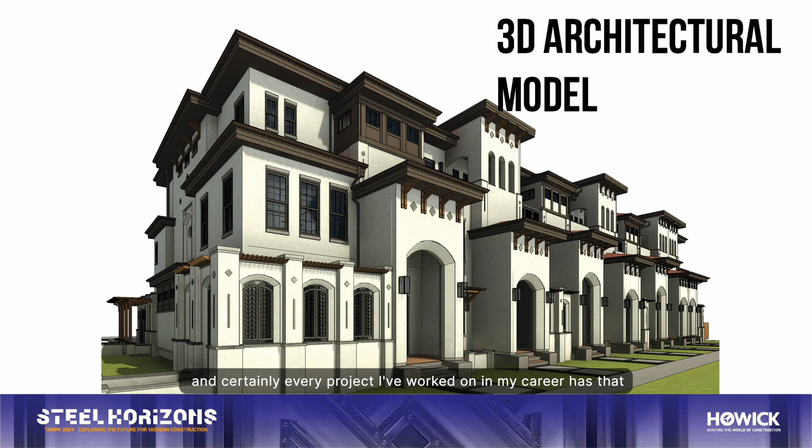The 3D architectural model that we produce as architects, pretty much every project has behind it a Revit model, and certainly every project I've worked on in my career has that, and it's basically a digital twin of what's to be built in the real world. It's packed, it's very robust, it's got all the detail, all the forethought, all the clash detection, pre-construction coordination embedded into this model. And inevitably, we as architects take a lot of time and care to get that right.

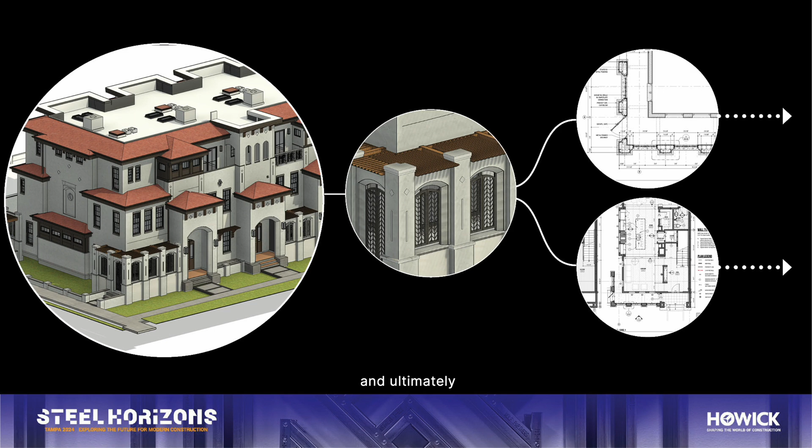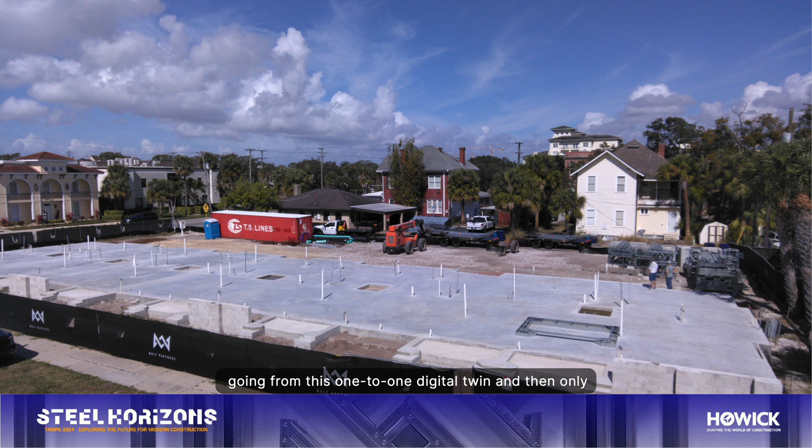And ultimately, it does get sliced into 2D drawings. And throughout my career, I always felt that there was something lost in translation, going from this one-to-one digital twin, only for it to be sliced into a standard set of construction documents that sometimes get misinterpreted on site, sometimes don't get looked at on site.

And we set out to figure out a way to take that 3D, highly refined, highly robust digital model and actually translate it from the digital realm to the physical in a way that we weren't going to be losing our ability to create novel design expressions for each specific project.

And for us, we wanted to create a prefabricated solution that wasn't contingent upon a repeatable output, or a modular expression, but rather consider all the building elements and components as their own set of modules that we can reconfigure so we can deliver architectural solutions to each site given the unique characteristics of that site.

So here at Wolf Partners, we are a development firm, an architecture practice, and a fabrication facility rolled into one, with the idea in mind to create that kind of mass customization across our projects.

Here we have our amazing team. They're over here, most of them, and it's an interdisciplinary team comprised of architects, interior designers, fabrication specialists, our capital partners, land acquisition and sales team, and I couldn't be more proud of the work that we're going to share with you today and all the effort that they've put in to get us to where we are from where we started.

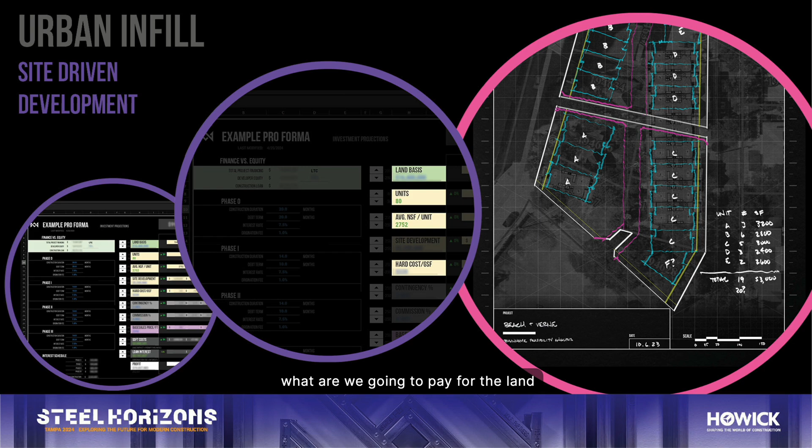Doing this urban infill multifamily development really starts with analyzing the site. And I know this is kind of development 101, but when we look at a site, we really only have control over a certain set of variables. That being, what are we going to pay for the land? How many units are we going to put on it? What size are those units going to be? And to a certain degree, what it's going to cost to build.

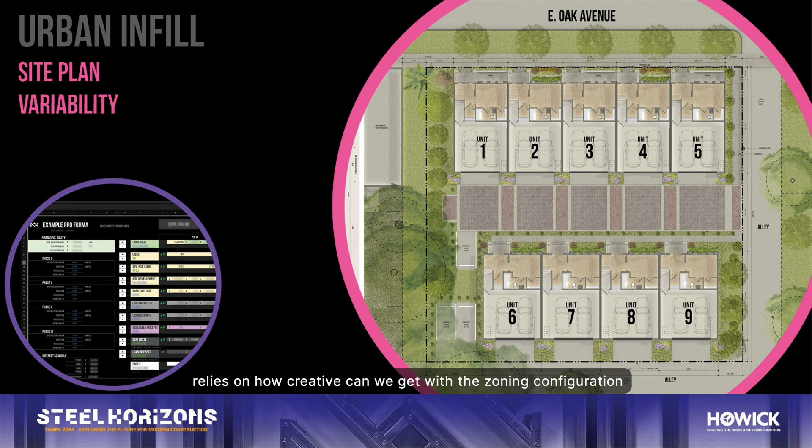Unlike multifamily or apartments where you establish a unit mix, or single-family home development, it's critical that we think of these sites as a one-off, and a lot of times the viability of a development project relies on how creative we can get with the zoning configuration, the plan development, and oftentimes we have to rely on coming up with a new unit design for each site so that we can go forward.

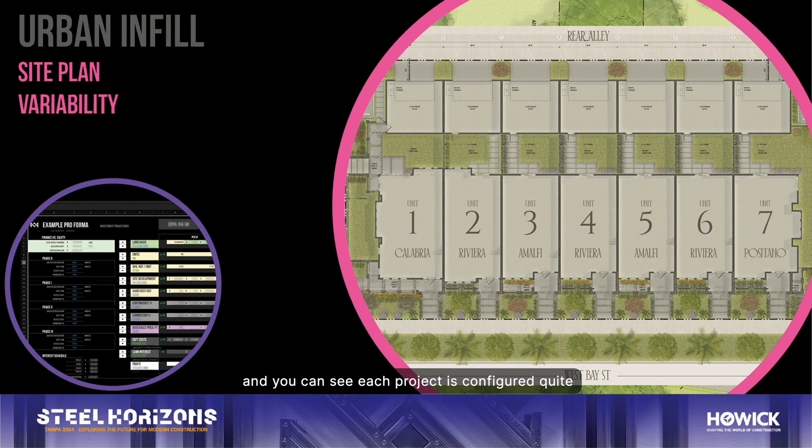And in doing so, I'm going to run through some of our site plans, and you can see each project is configured quite differently based on the unique conditions of the site, and we'll get into some of these later.

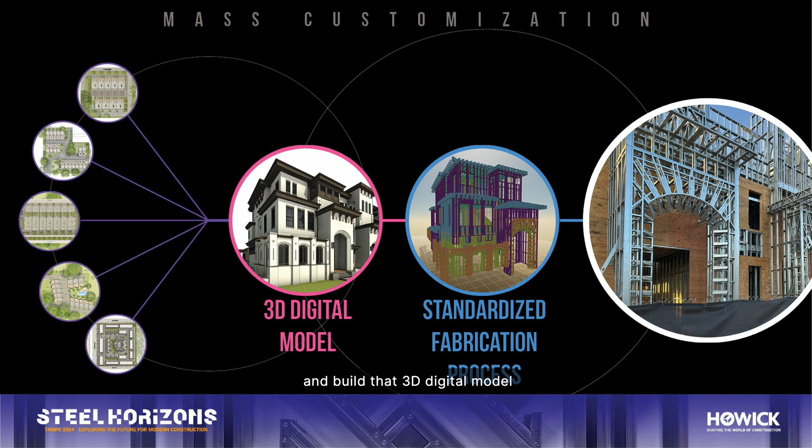But the intent is that we can respond appropriately in scale and context to each one of these development sites and build that 3D digital model, that digital twin, but then run through a standardized fabrication process with the Howick machines so that we can create unique architectures across projects that are very contextual and very appropriate in scale and materiality and style for each given site.

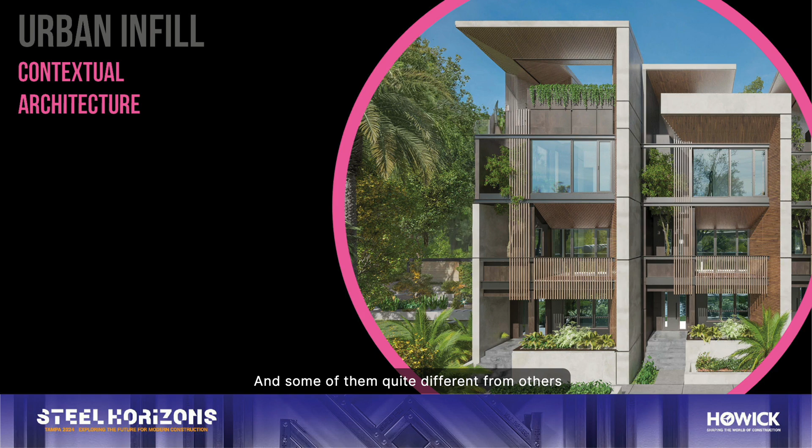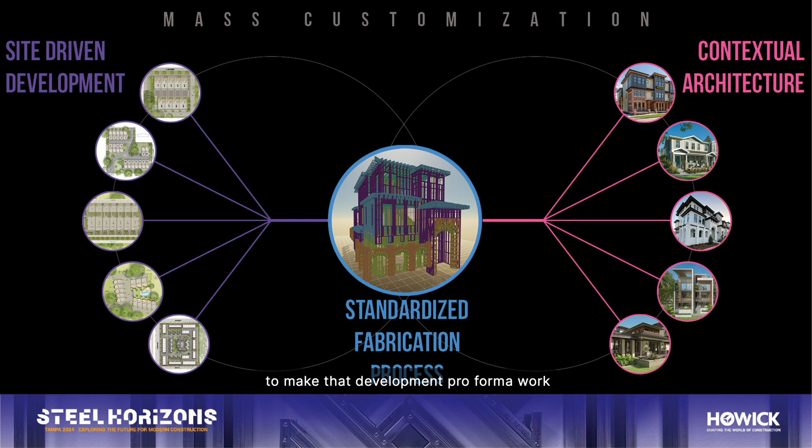And so what you end up with is a couple of our completed projects here that have different architectural styles, very much in keeping with what's adjacent in their neighborhoods and surrounding areas, and some of them quite different from others. And so the idea of this mass customization is we take that site-driven development, configure the site plan as it needs to make that development pro forma work, but also serve the community best.

All that design stuff happens over here. Once it crosses that wall into our fabrication shop, that process doesn't change. It's kind of agnostic to what the final project will be in terms of style, context, building type. But we're working on standardizing that fabrication process as a means to maintain creativity and architectural expression across our projects.

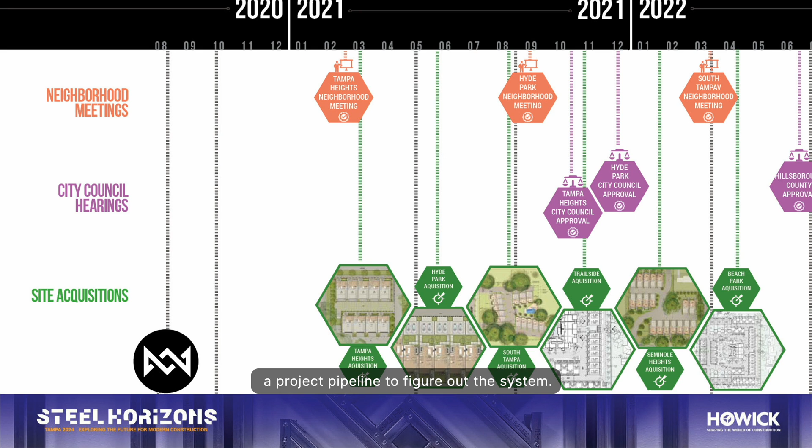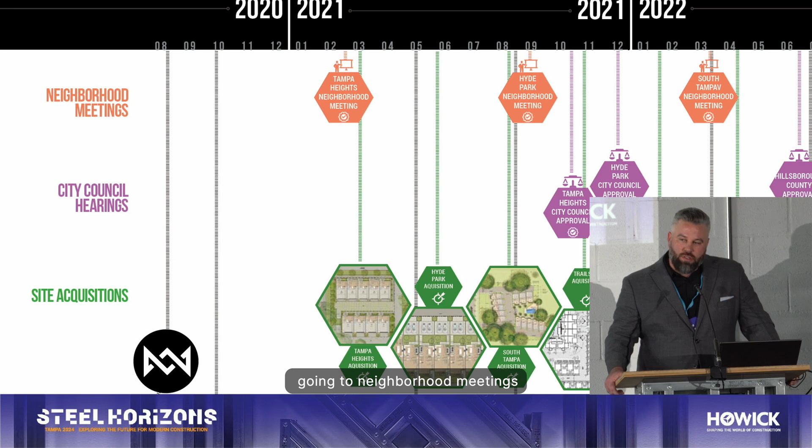So a little bit of our timeline: we started back in 2020, and the idea was that we needed to kind of build a project pipeline to figure out the system. It's a new system to us, and before offering it to the market at large, we wanted to scrape our knees and figure out all the inherent problems that we don't even know yet. And so we spent the first 18 months or so acquiring land, going to neighborhood meetings, going to city council hearings, rezoning, all with the intent of finally getting to the point where we can get into production.

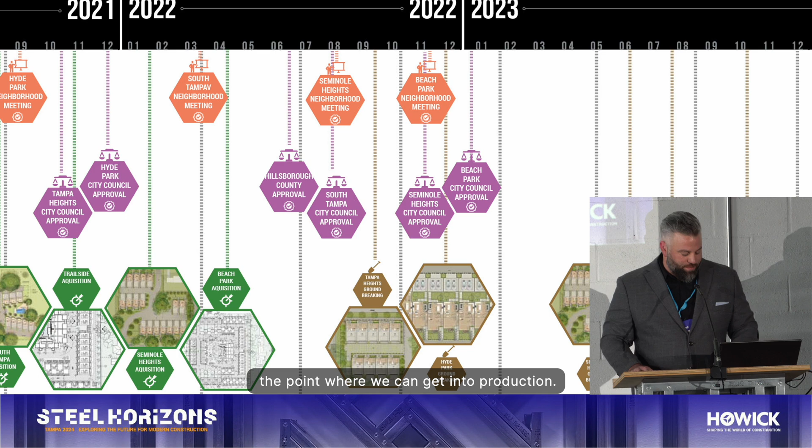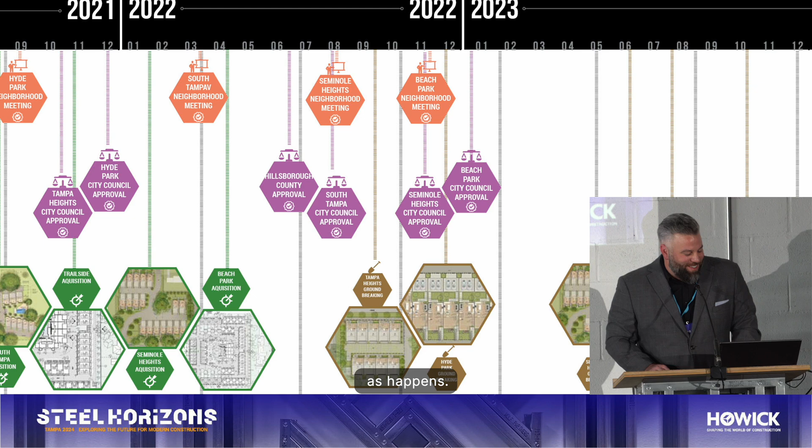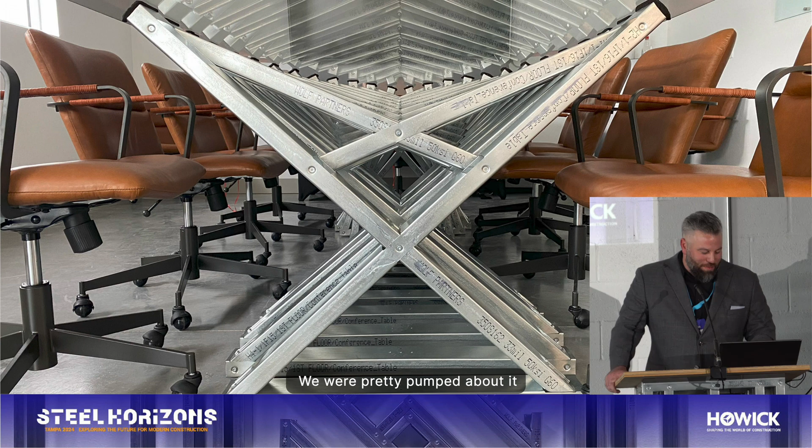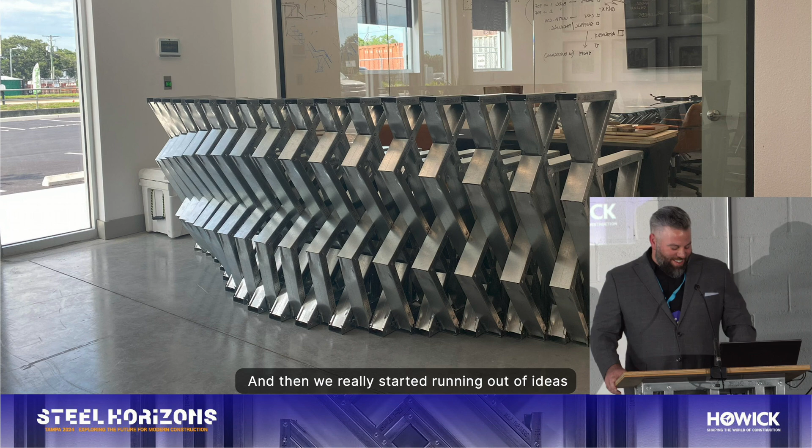And we tried to time our machine orders from Howick with our first permit being issued, and we got it wrong, as happens. So we started making furniture after we got our machines. So the first thing we rolled was this conference table. We were pretty pumped about it. And then we thought, surely permits are going to be issued. Didn't happen, so we made a reception desk. And then we really started running out of ideas, so we made a logo wall.

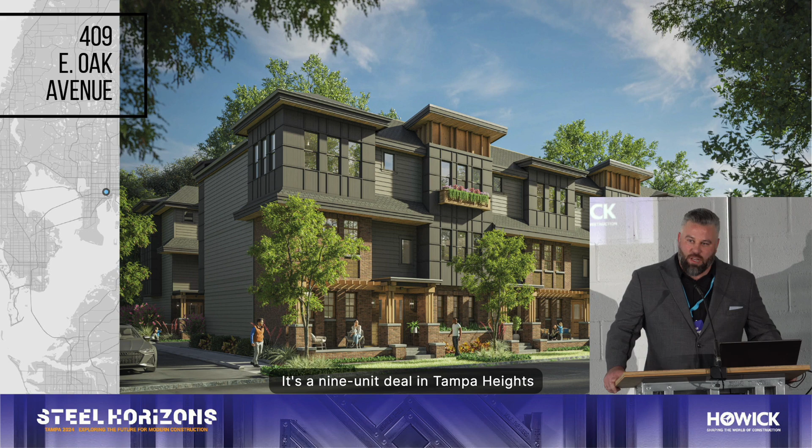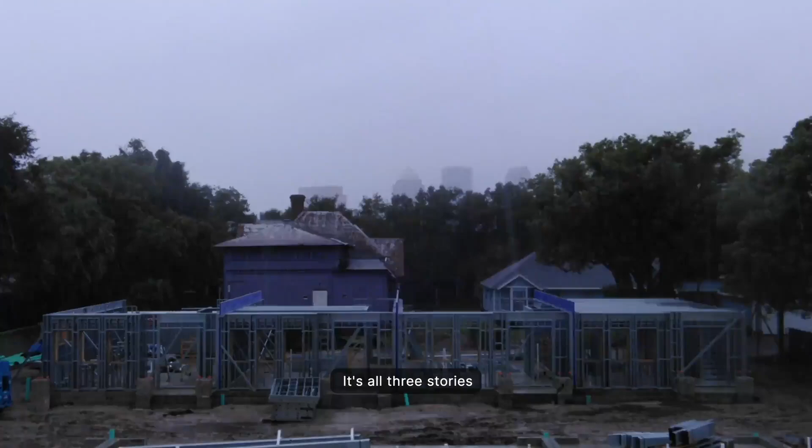But finally, we had our first project permit issued here. It's a 9-unit deal in Tampa Heights, consisting of 2 unit types. And here's the time lapse of that production. It's all 3-story, for-sale townhomes.

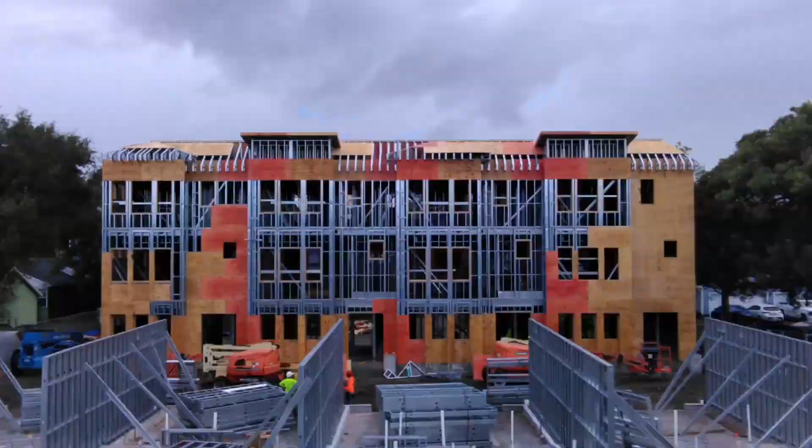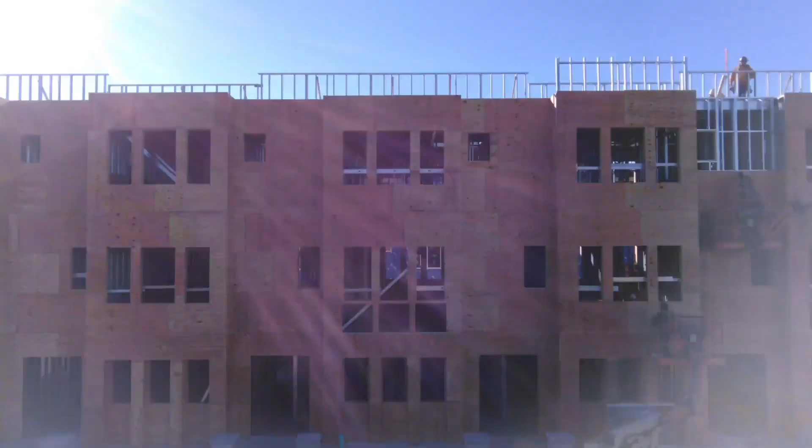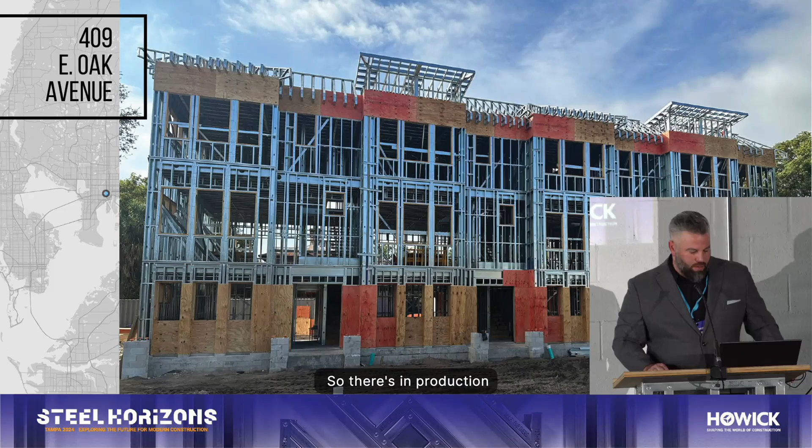And here behind us, you can see the mock-up that we built, trying to solve that mansard truss and a couple of other key details there. So there's in production, and there's the final photo. That was completed about a year ago, and a shot of the interiors.

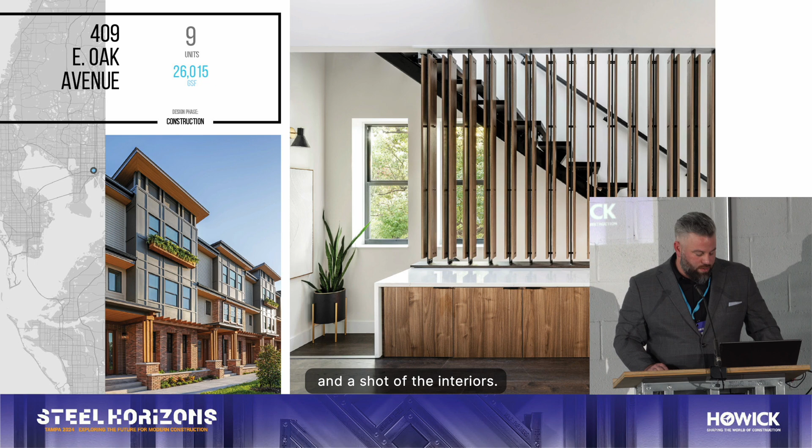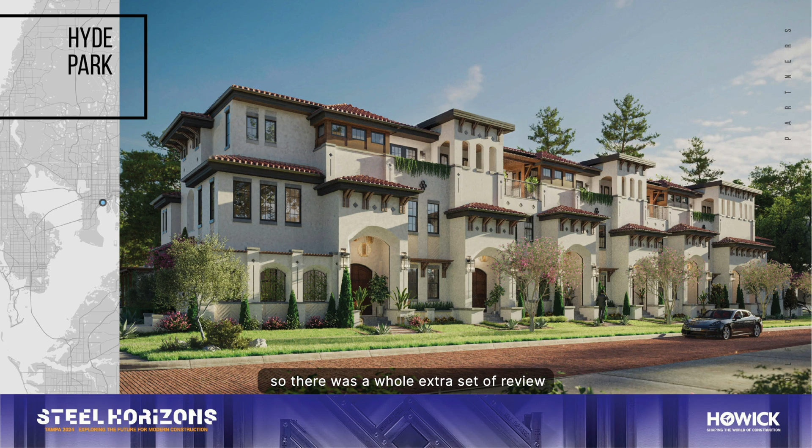Next project is a 7-unit project in Hyde Park, and if you don't know, Hyde Park is probably one of the most affluent and desirable neighborhoods in Tampa, and it called for a much different design response. We could have put 9 of that oak unit type here, but we thought that decreasing the unit count and offering a larger product would be more appropriate for this neighborhood. And then it's also in the historic district of Hyde Park, so there was a whole extra set of review, and so we landed on this kind of modern take on Mediterranean.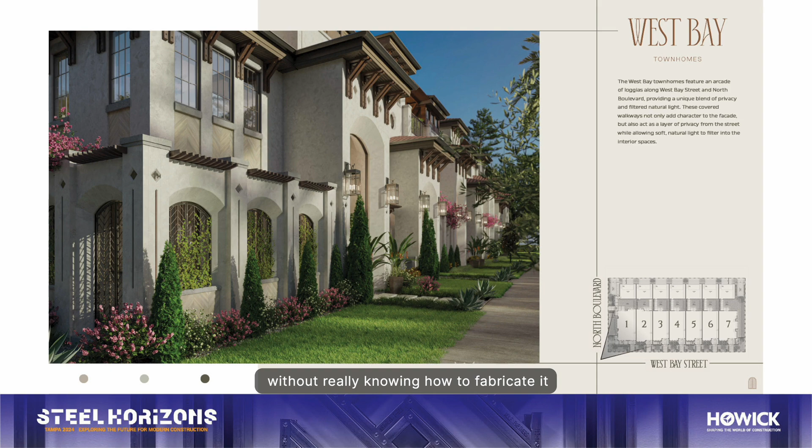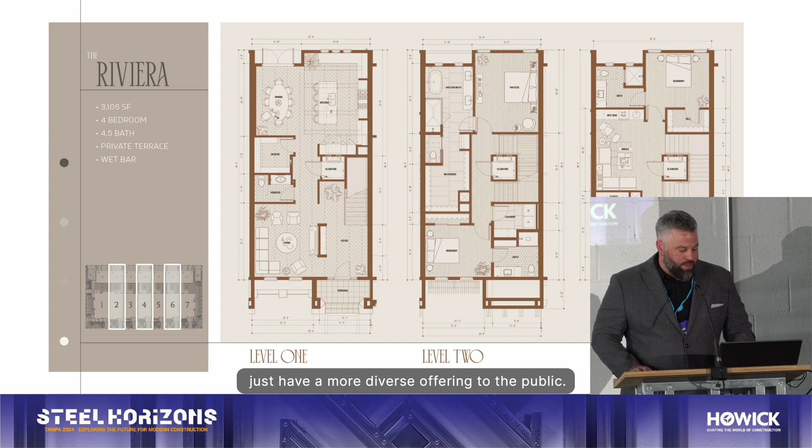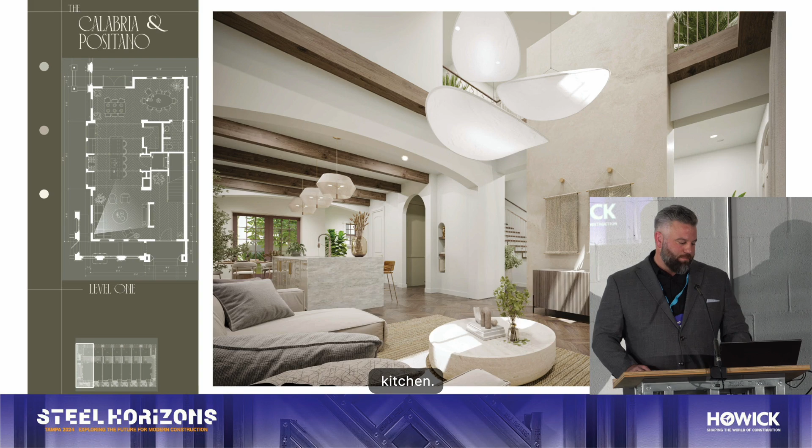We designed that kind of canted arch without really knowing how to fabricate it, so that was a unique design challenge. Within those 7 units, there are 3 unique unit types as a means to just have a more diverse offering to the public. Here's the entry foyer, the living room, double height living room, kitchen. We have a lofted area up there above the living room, the master bath, and finally the framing model.

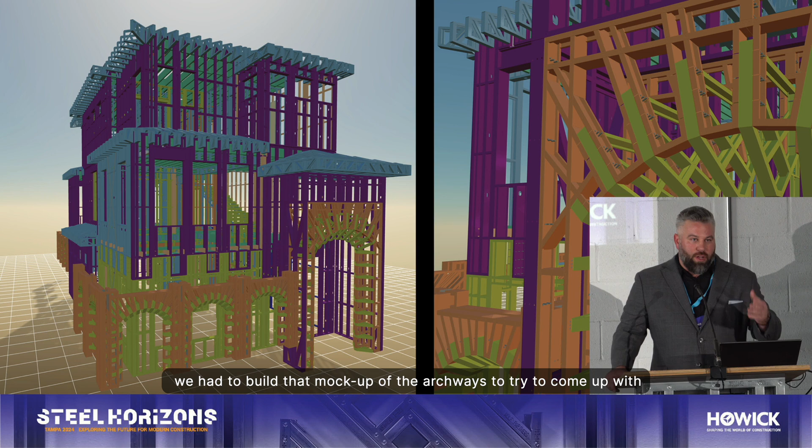This was by far more complex than the first project. The oak framing model was quite complex; this one had even more complexity. As you can see here, we had to build that mock-up of the archways to try to come up with a way to get that double curving surface out of standard stick parts. And so we built those arches in 2 pieces here in the shop and delivered them to the site.

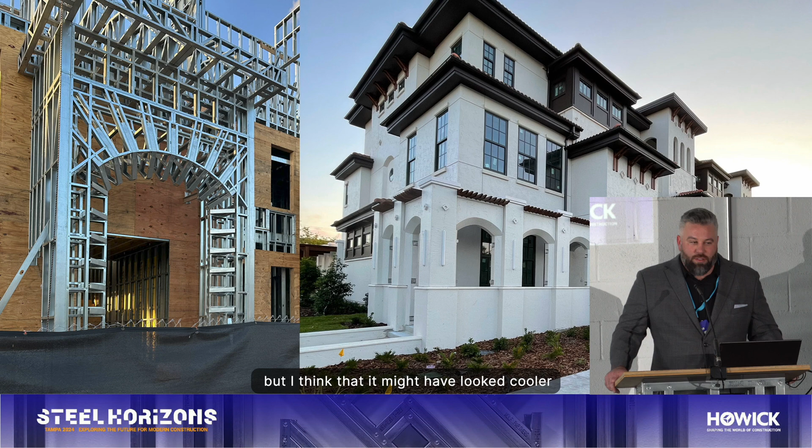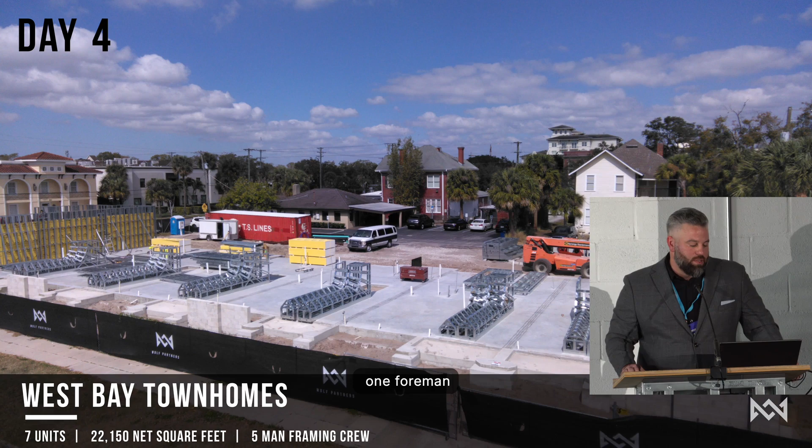And we're proud of how this turned out, but I think that it might have looked cooler before we put sheathing on it for a little bit. And we've got a time lapse of that. Our framing crew consisted of 5 framers, 1 foreman included in that 5, and it's about 23,000 gross square feet that they were able to build.

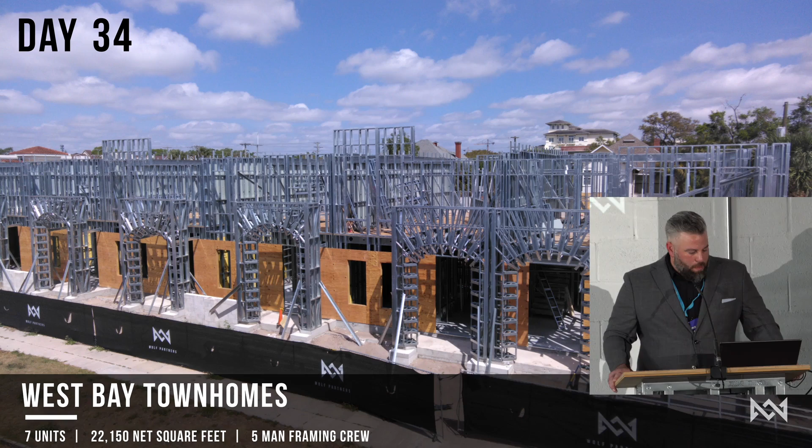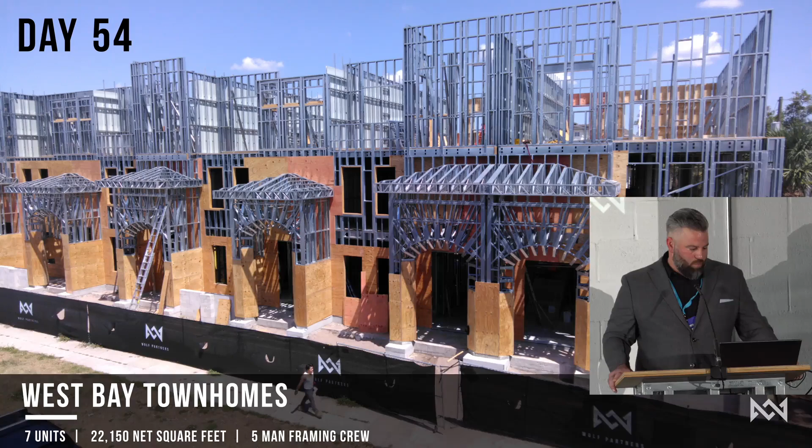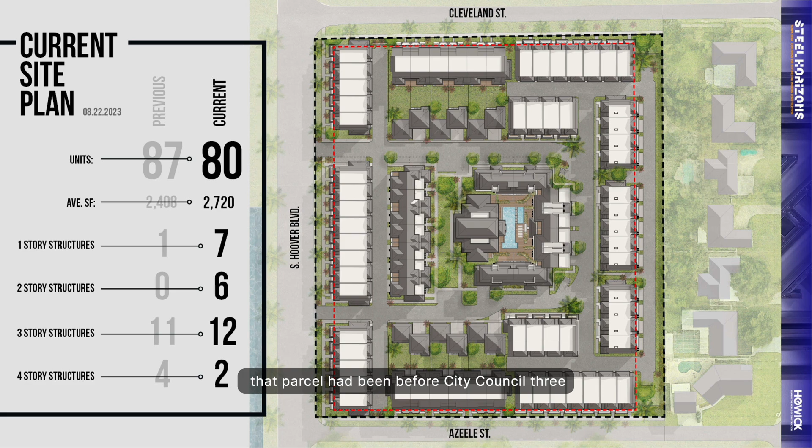One of our upcoming projects is 80 units in Beach Park, and I'd like to share, this is snippets of our presentation, our second presentation to the Neighborhood Association. This project is interesting in that that parcel had been before City Council 3 times prior by 3 different developers. Each time they didn't get the support of the Neighborhood Association.

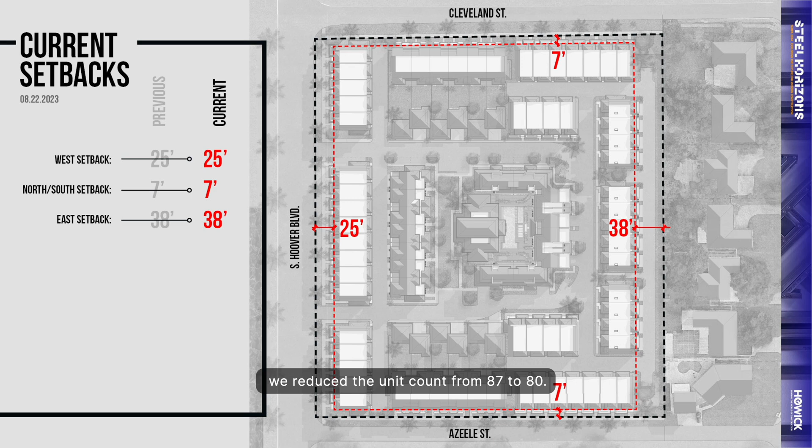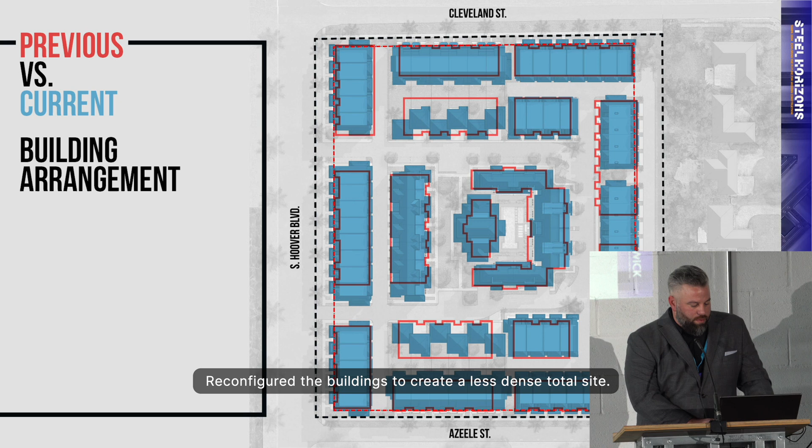So our first order of business, as we often do, is to go talk to the neighborhood and figure out what their concerns are, what their desires are, and what they'd like to see on that site, and try to cater to that community and really make a positive impact rather than kind of thrust our own intent on a project. After our first meeting, we reduced the unit count from 87 to 80. We increased the setbacks. They were very concerned about privacy along this east perimeter. Reconfigured the buildings to create a less dense total site, increased the green space.

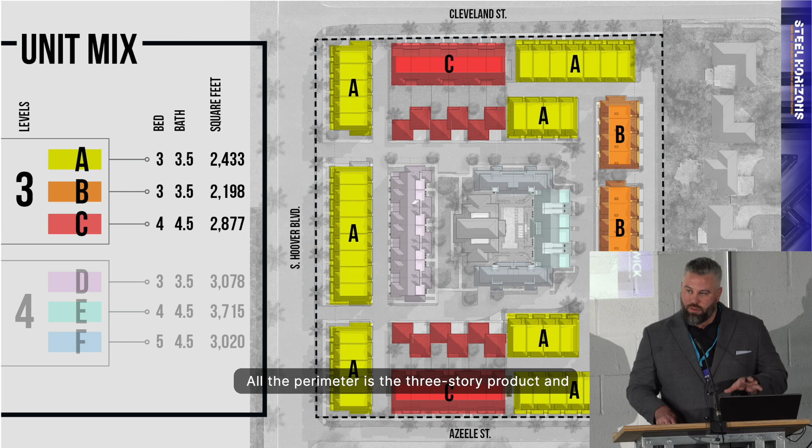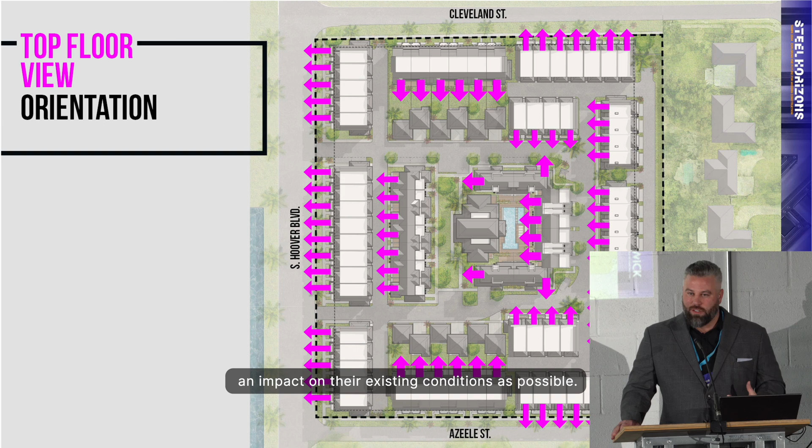We have 6 different unit types across this project. All the perimeter is the 3-story product, and then in the interior is the 4-story product. In order to maintain the existing neighbors' privacy, we oriented the rooftop balconies to have views away from the existing homes so we could be as light of an impact on their existing conditions as possible. Added extra parking that wasn't required, landscape buffers.

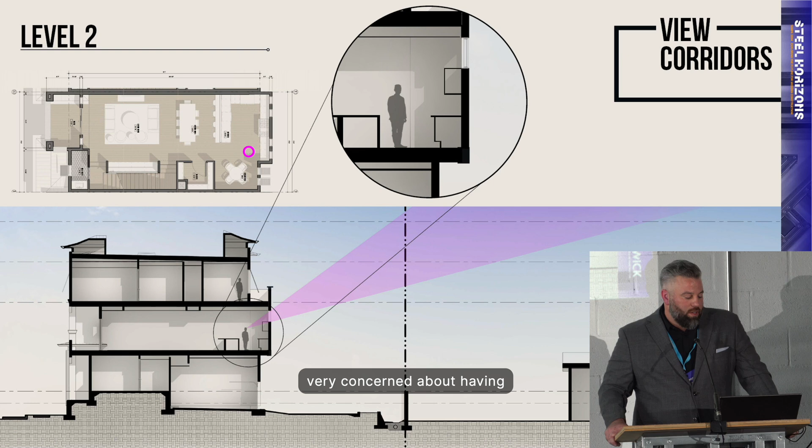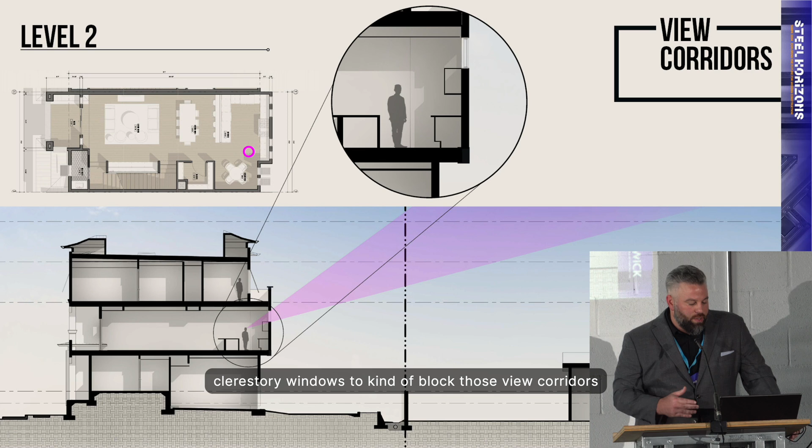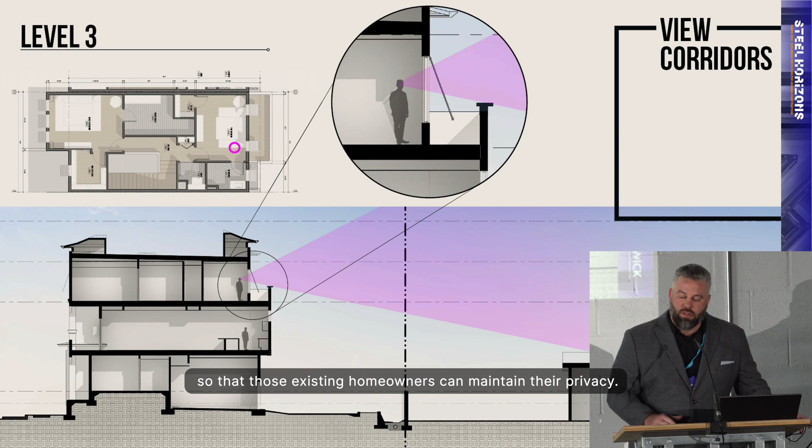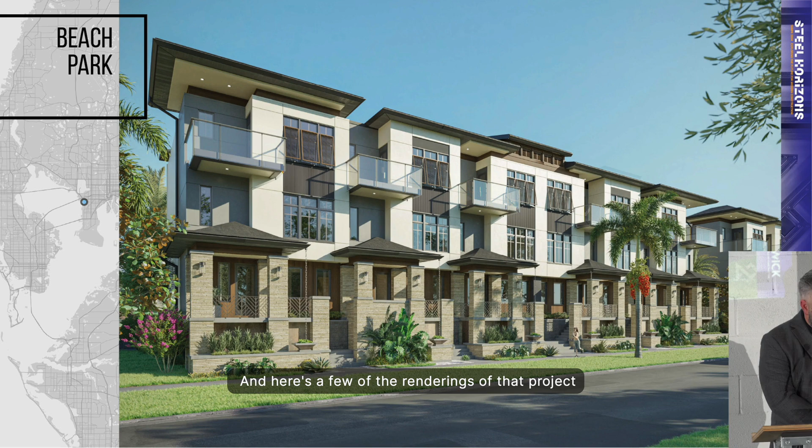Again, the neighbors to the east were very concerned about having new 3-story buildings overlooking into their backyards. And so we coordinated our architecture with clerestory windows to kind of block those view corridors, both on the 2nd floor and on the 3rd, by recessing that bedroom, elevating a parapet so that those existing homeowners can maintain their privacy. And after having worked with this association, they came in full support at City Council, and we were able to move forward. And here's a few of the renderings of that project, slated to start beginning of Q2 2025.

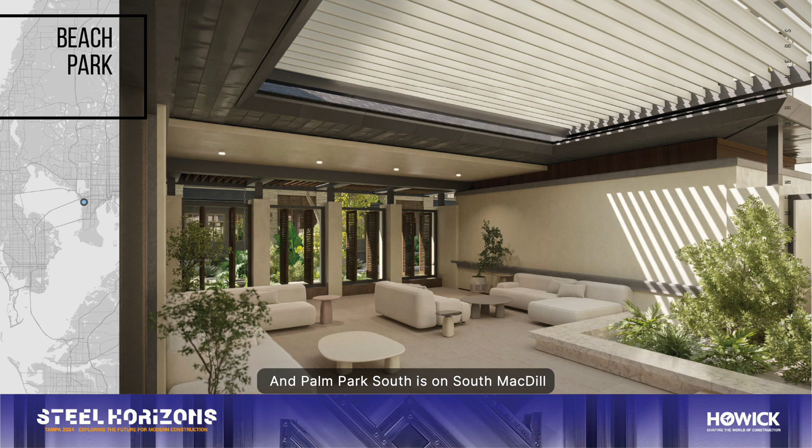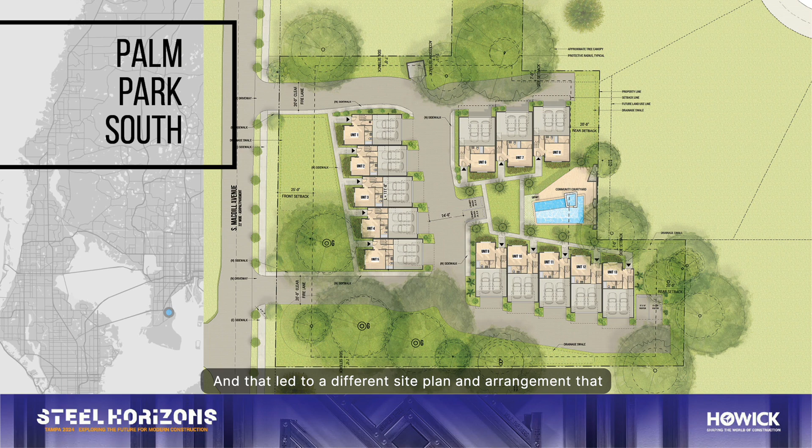And Palm Park South is on South MacDill, just on the southern tip by the Air Force Base. This project, or this site plan, was driven by grand trees, if you can believe it. The neighborhood association was very concerned that a lot of developers were coming in and basically decimating their existing forests. And they said, we will not support your project if you touch the trees. And said, okay, we won't. And that led to a different site plan and arrangement that we wouldn't have otherwise probably organically chosen. But with those constraints came some creativity.

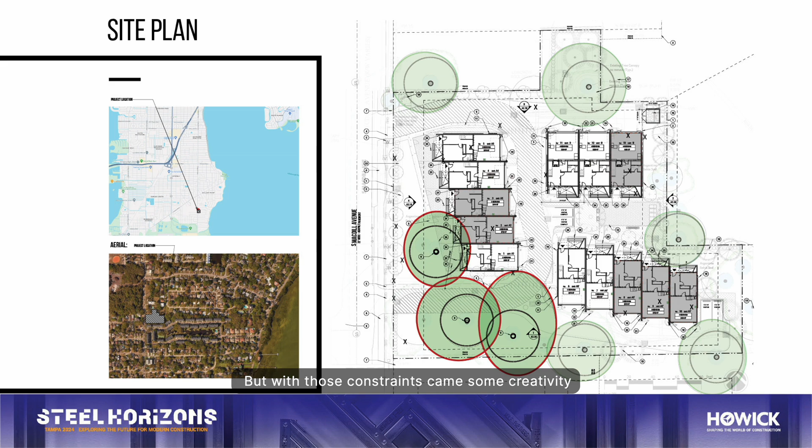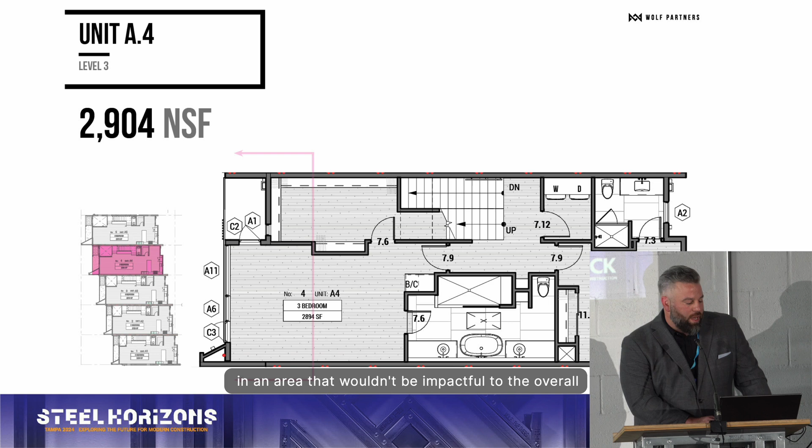So we have this staggered building type. And once we kind of offset each building from one another, we realized that we were so far set back to stay away from the trees, but we still had a little bit of room. So we decided to take each unit sequentially and increase the length where we had it by a 16-inch standard joist or stud bay in an area that wouldn't be impactful to the overall coordination of bathrooms and things like that.

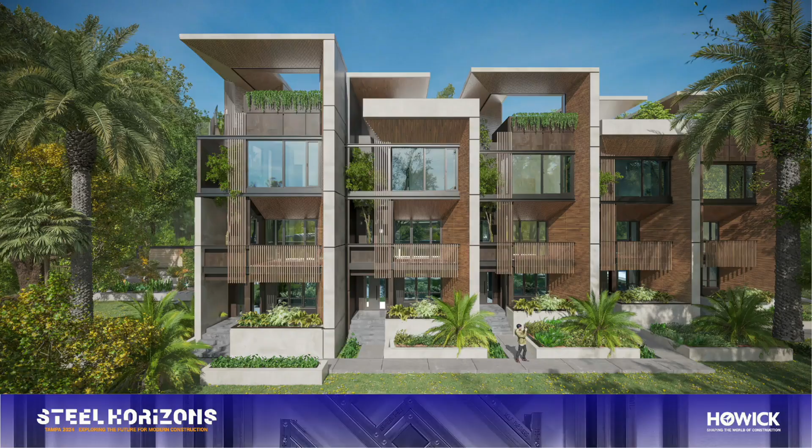All right, one last project to touch on, the Motor Enclave. Some of you may be familiar with this. It's just outside of town. It's best described as a country club for car enthusiasts. So you can buy car condos and store whatever types of exotic cars you have. There's a 1.6-mile racetrack associated with it. There's a dirt track behind.

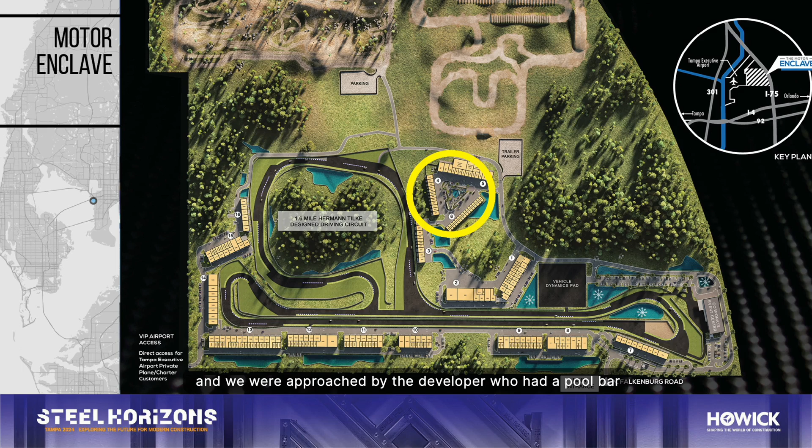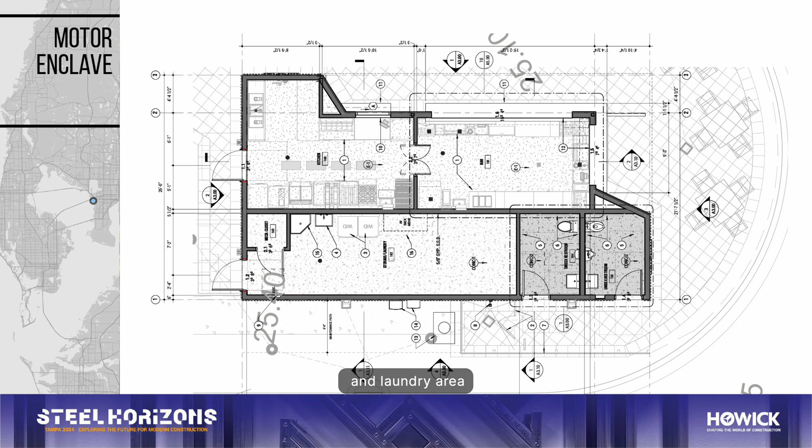And we were approached by the developer who had a pool bar and grill slated to be designed out of shipping containers. They utilize shipping containers in some of the site. It was going to be too costly for them, so they said, can you redo this out of your system? We said, surely, but those dimensions weren't really right for the program that was going to be contained within them, so we decided to combine both the bathroom and back of house with the bar, grill, and laundry area, but still maintain that same kind of shipping container aesthetic with a slight carve out.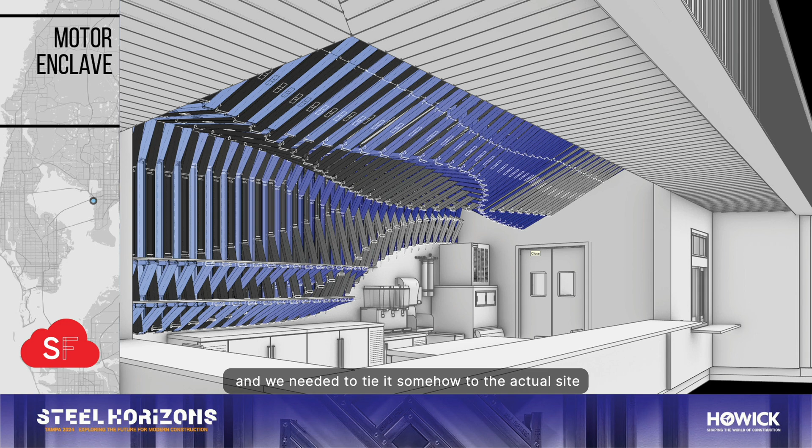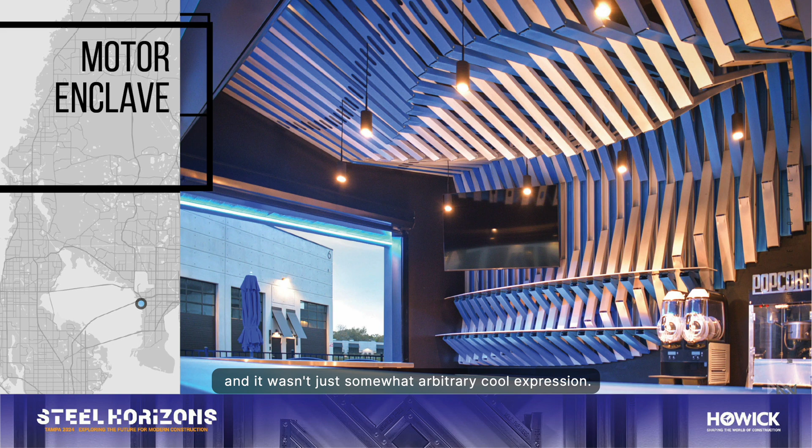And we needed to tie it somehow to the actual site. So we took the curvature of the first turn of that racetrack and basically projected it up onto the ceiling to become the apex of those trusses. So there was some relation to the site, and it wasn't just somewhat arbitrary, cool expression. And here we have that under construction and the completed project.

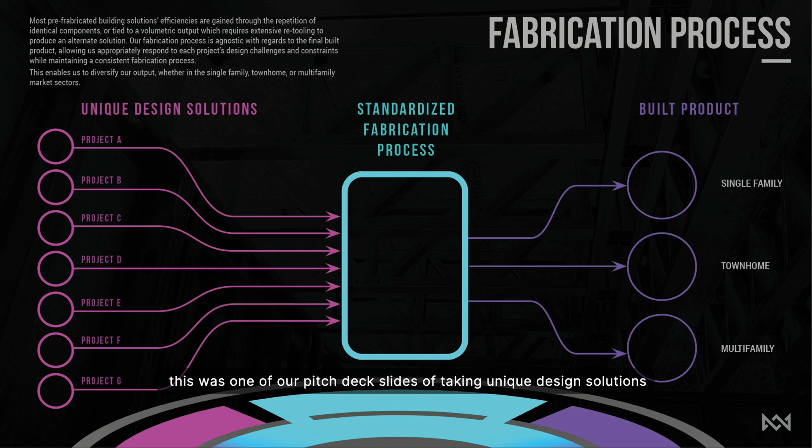So I'm about to wrap up, but I wanted to share this. When we had this idea back in 2020, this was one of our pitch deck slides of taking unique design solutions, a standardized fabrication process into the built product. Those circles and processes are blank for a reason, because we did not know what the projects were going to be. We didn't know how to figure out the process, and we weren't sure if we were going to be able to build those projects.

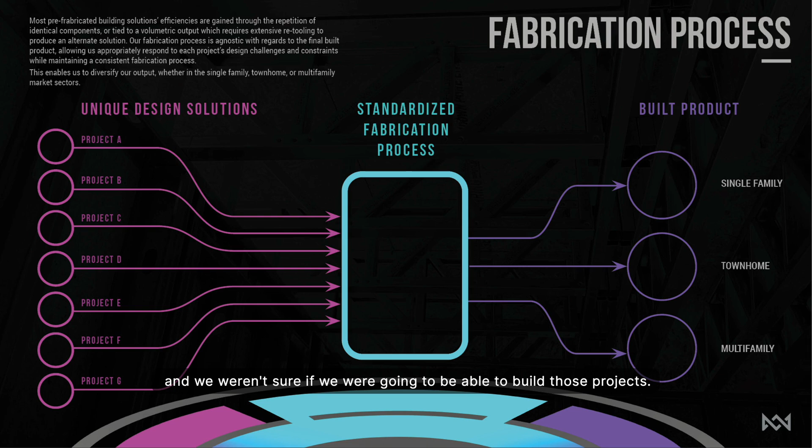It was just kind of a pipe dream at that time, but we had a great family investment come in that had experience in the manufacturing space. They're unable to be here today, unfortunately.

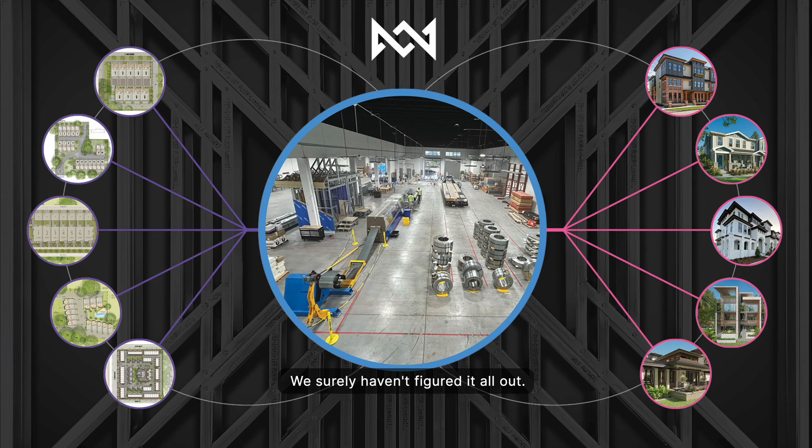We surely haven't figured it all out. We're still working the kinks out, but we've got to do some really exciting projects. We do have a process that is working for the most part, and we've built some multifamily, we've built some townhomes, and the last thing that we have is a new single family coming on board. It's in the design phase right now, but we'll be starting that this year as well.